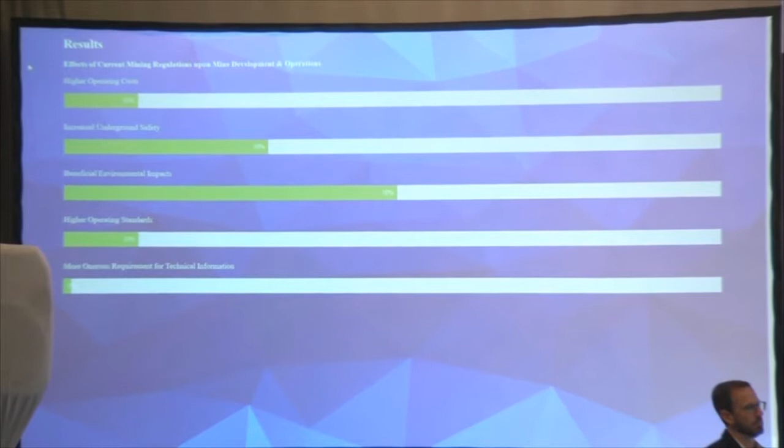Okay, thank you, Arthur. Okay, thank you, Natalia. Now, we are starting the last session, and our aim is to finish at 5:45. So I'll pass the microphone to Peter Robinson, who is director with Metal Fair, and the session will be focusing on sustainable mining, specifically technologies and operations which are available at the moment. Thank you.

Good afternoon. Well, I'd like to start the last session by offering my congratulations to us. We've survived an Arthur conference where not a minute is put to waste, and you're still here for the last session. Well done.

The last session is about sustainable mining. Now, I'm an operational miner and a digger, and it's interesting what sustainable mining means to everyone in mining. But for me, the key issues are environmental impact, progressive restoration, progressive planning for closure, underground safety. I'll be very interested to see how our speakers bring those issues into what they're going to say. Chris Bray will start us off by talking about underground mine planning and developing technologies.

Okay, this is working. Thank you very much for staying for the last session here. It has been referred to as the graveyard shift, but I think Arthur strategically put it as the last session because it's a very interesting hot topic in the industry at the moment. I think a lot of the following talks are quite complementary, in different levels of detail or aspects of developing technologies in the mining industry.

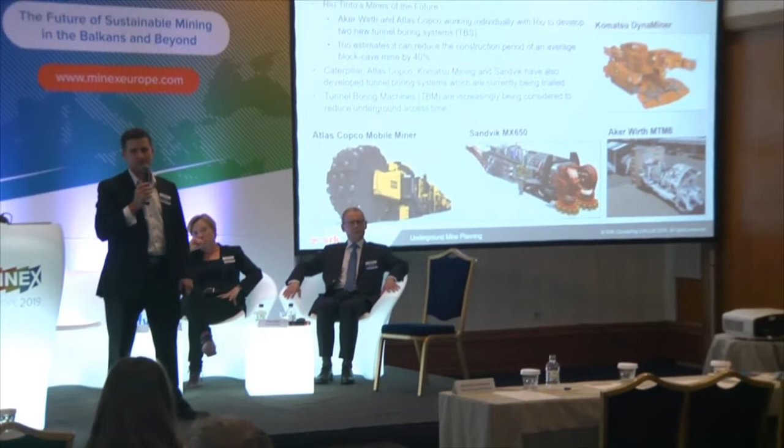On the topic of rapid tunnel development machinery, pretty much all of the major underground equipment providers are looking at different solutions to break away from traditional drill and blast tunneling machinery. The types of machines have all got different strengths and weaknesses and approaches, but generally use different modes of cutting and vibrating techniques for breaking the rock, which can have significant advantages from reducing access development time, which is just so important for paying back all that initial capital for getting new projects up and running.

But if we look at rapid tunnel development type equipment, some of the areas that we've focused on that compare the different options for machines, which make it a little bit limited in terms of rapid development, and you can lose some of that advantage of the cutting capacities of the machines, is that while you might have advantages of a lot less development and a lot less ventilation and re-entry time compared to a drill and blast type activity, you've got significant limitations on the turning radiuses of some of these tunnels from a lateral or a vertical aspect. Let's just say your tunnel profiles are a particular type shape.

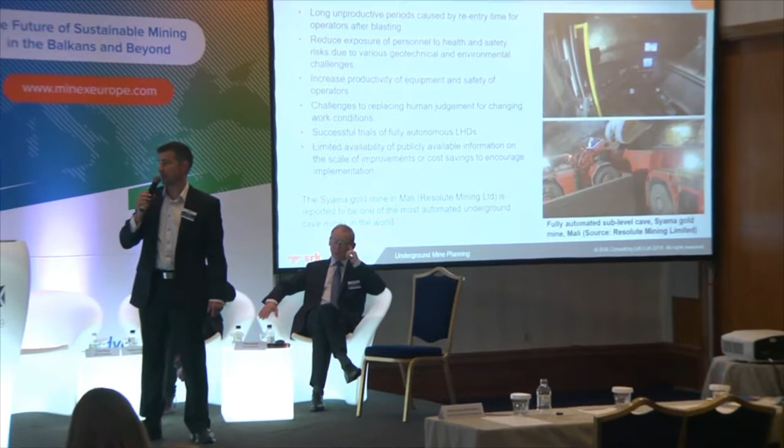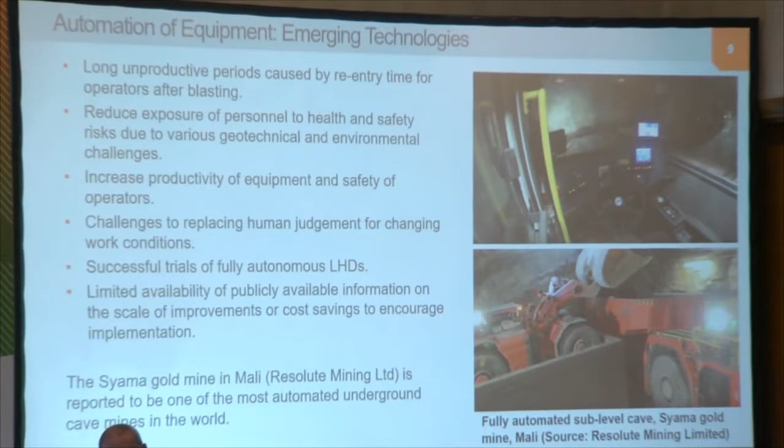One of the mines that's been in the news recently is the Syama gold mine in Mali. It's reported to be a fully automated underground cave mine. I look forward to hearing more about this and hope to see it one day. But it just shows that if they can develop a system like this in a place like Mali, you can probably do it in most places around the world.

So, you know, I'm trying to give the impression that while you should tread cautiously with all of these developing technologies, you shouldn't be afraid of them, because most of them, if they're at this stage now, they could be applicable to your future operation.

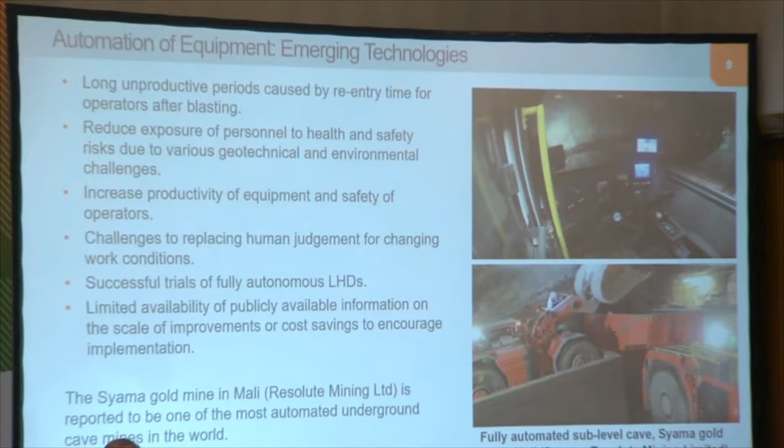With respect to automation of equipment, if you're going down that path on the mine design side, it sort of pushes the planning engineer towards, in a lot of cases, pass-type systems. Pass-type systems mean other type complications, whereas you want a system that's going to be reliable and it's going to last for as long as you need it to.

And I believe everything in this area can be engineered, but it comes at a cost. So you've got to go in there with your eyes wide open and not just assume that one size pass fits all. It's not the case. They can be very costly items if they're not going to be developed for the job.

Sorry, running away out of time here.

One of the themes that is popping up more and more often is underground processing. This can be in many different areas, but we see it a lot with underground backfill plants. People don't want to move waste further than they should, and they shouldn't.

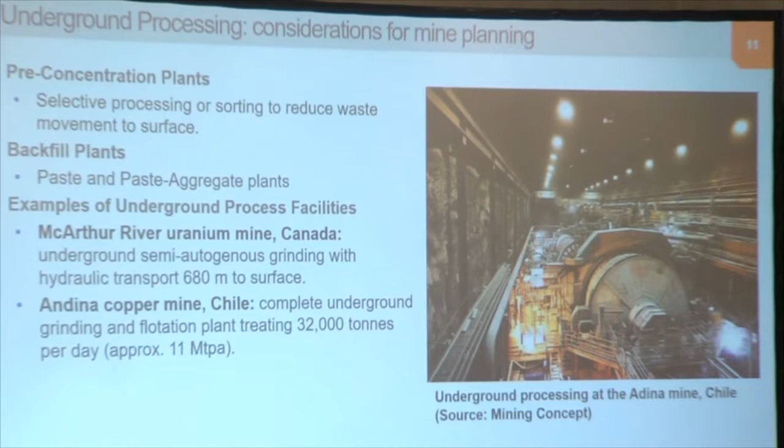So just in conclusion, there's some real benefits to some of the developing technologies that I've shown you here. I think you all should consider them. So don't be afraid. The benefits hopefully will be greater than the cost.

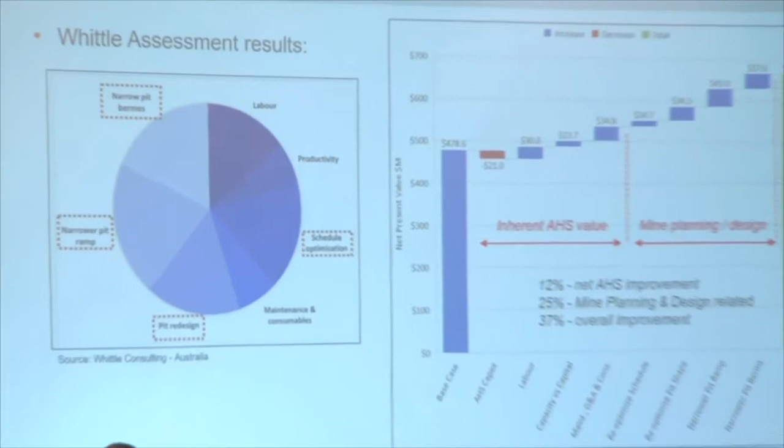And 12% of that is due to the net autonomy improvement associated with the reduction in cost, but 25% of that increase is actually due to mine planning and design opportunities. So even though this is conceptual, it does show that there might be some significant downstream strategic benefits in autonomy that are often underestimated.

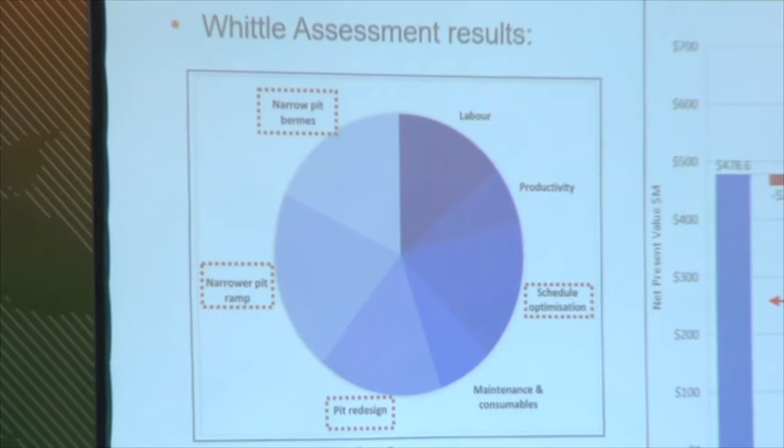So the approach to their study, they used costs based on autonomous operations in Western Australia. They assumed 700 to 1,000 additional hours per annum per truck, so that means there was a reduction in the overall fleet. Tire replacements were scheduled at 6,000 to 7,000 hours instead of 5,000, which is typical. A reduction in costs meant that the pit needed to be re-optimized, so the Lerchs-Grossmann algorithm produced a larger, more profitable pit.

Because autonomous haulage uses high-precision GPS, which is accurate to centimeters, there's a lower passing tolerance on trucks. So they also incorporated this in the ramp design, which would affect the overall slope angle. Needs to be confirmed by a geotechnical study, of course. Autonomy can be better coordinated through periodic two-way passing lanes. There's a lot of potential for that.

And because you've got fewer human operators in your pit, the severity of a rockfall would obviously be reduced, so there's potential for looking at higher risk slopes, basically. Of course, this is conceptual, and we would definitely advise if any of these considerations are incorporated, you do it in a proper geotechnical study.

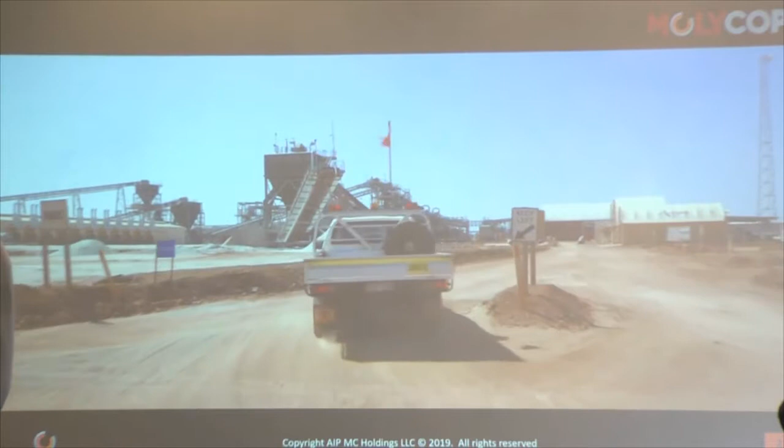For us, these companies shoulder the responsibility of progress. They keep society moving forward, building sustainable relationships, and developing the communities they work with. And we proudly stand beside them. In fact, we go with them to these places out there that others deem too hard, too far, or too costly. We go to liberate the value of every resource. We go to the ends of the earth.

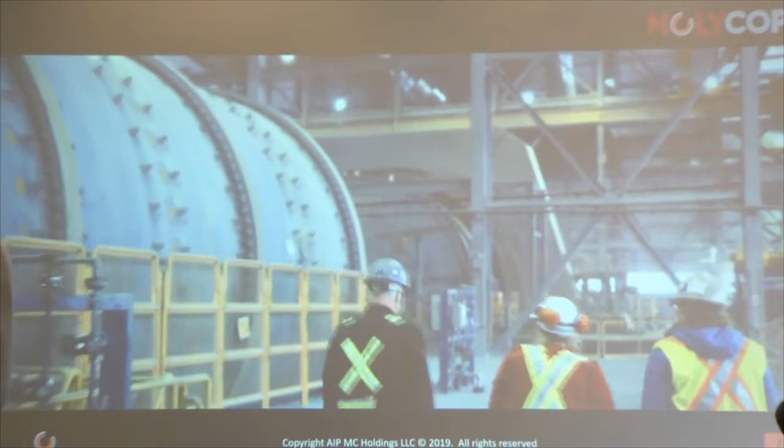How's it going? Good, good. How are you doing? With them and for them, to ensure our finite resources are responsibly used, while never compromising on safety and always fulfilling our promise. We are Molycop, and we're in the business of liberating value for those we serve. To the ends of the earth and back.

This is what mining for us is all about. It is working along with mining operations, with people that are there on a daily basis in these very remote locations, trying to liberate value that will support the development of society. So if you then try to translate this into what we do today, the products that we make in our company and the products that we always try to supply to our customers are meant to be responsible to generate value on the mining operations that we serve.

The products that we sell, of course, are intended to generate a profit to our company, but not just because we will sell high volumes of our products, but because we will sell something that is useful, that will generate the right effect on whatever application it's meant to be used for, and also because of the way we actually make these products in our own factories.

Whenever we are making grinding media in all of these factories we have all around the world, we always think on how to make a product that will generate savings for our customers. And whenever we talk about that, we always think about where the raw materials are coming from, how this product is made, how efficiently we are using the energy that is needed to manufacture some of these goods, and also what will be the repercussions of the use of some of these products for all of our customers.

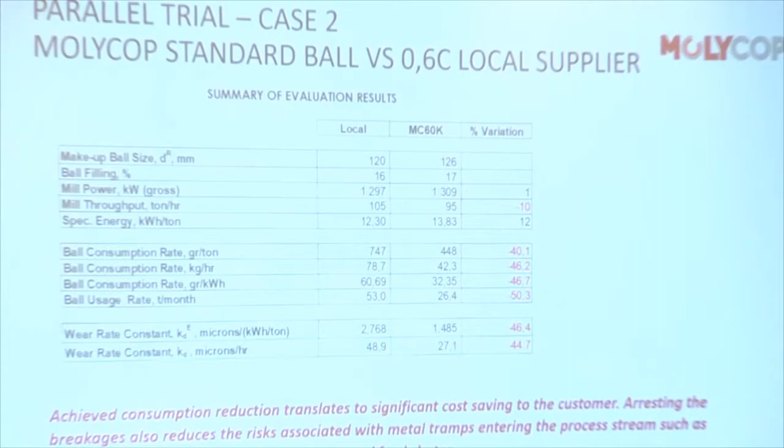Something that is really important for us is always to work along with end users about what they are targeting, what they are willing to do, and how to help them achieve the specific goals on their operations. It's not just for us to work on supplying products at the right price. It's for us to work along with all of our customers to know what they need, to know what they want, and to tailor-make products from start to end.

Nowadays, the way ores are developing, changing on a frequent basis, is forcing most of us in the industry to really be flexible about the supply of products we have available to provide. If you're not really on top of these things on a regular basis, your chances to really develop something good for your customers are kind of limited.

When you look at technical services, all mining companies are always targeting to reduce the OPEX, to have the lowest cost of operation, the lowest cost of ownership, and to be as efficient and productive as possible. And for this, it is no secret for anyone in the industry that being in this commodity world, it's always difficult to have the lowest cost whenever you're operating a mine site. So providing not just good products and good quality will allow mining companies to be really aware of what is happening, really on top of what they really need and want, and also to be able to make more money.

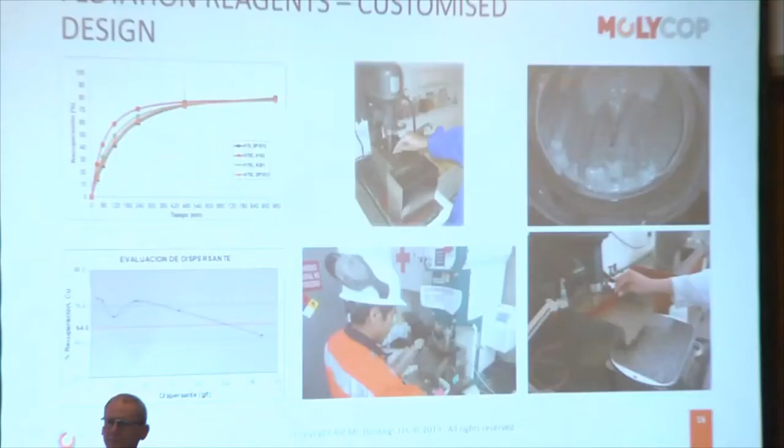Trying to finally give you a message about what we have that will be really interesting for you to look at: maybe most of us have heard about the Molycop tools. The Molycop tools is a tool that has been in the market for almost 40 years, is about to be launched in its version number 4, and is used by metallurgists and process operators all around the world to really look at how the process could be improved in such a way that they can generate more recovery, having a very good understanding of the parameters and operational variables.

So I encourage you to have a look at this because this is something that we provide to our customers on a regular basis, and it's really useful. At the end it is directed to the exact same purpose, to be more efficient, to be more productive, and to save money.

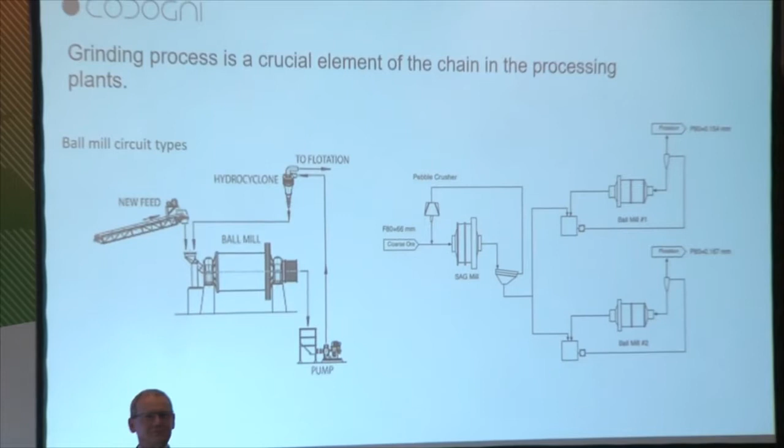So, as we all know, the grinding process is a crucial element in the chain of processing plants. How it looks depends very much on the design. There are SAG mills, autogenous mills, ball mills, primary ball mills, secondary ball mills. So these circuits can be very simple, like you see on the left, or much bigger, as you see on the right. But what is very important for all operators or managers of processing plants is the composition of costs. Of course, it might differ, but this is what I tried to collect.

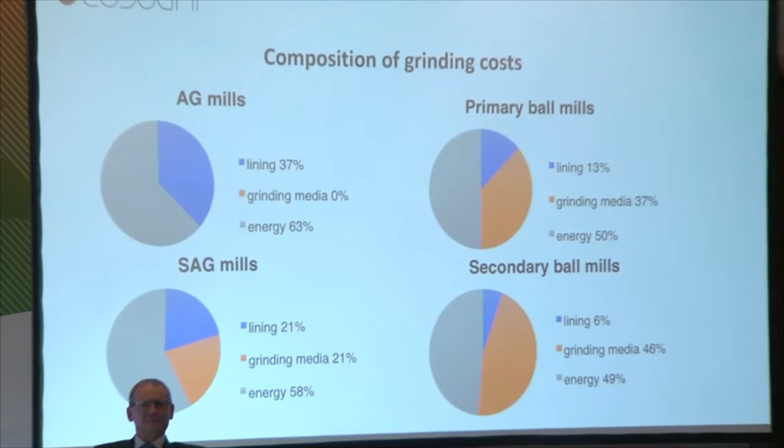So, of course, in autogenous mills, there are only two components of costs: lining and energy. That is the biggest part. And other mills, SAG mills and primary ball mills and secondary ball mills, have this additional cost component that, especially in the case of secondary ball mills, is quite a big one, almost half of the total cost of the mill operation.

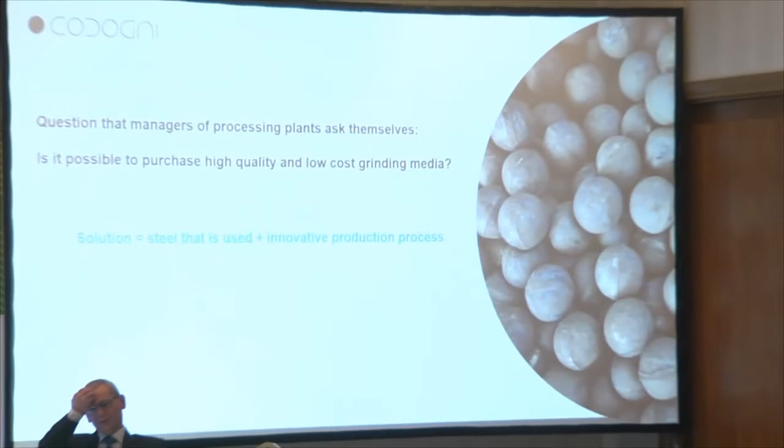So the question that has to be asked and is asked by managers of processing plants is: is it possible to purchase high quality and low cost grinding media? And we have our own solution to this question, and of course the answer is yes. And the answer consists of two elements. One is the steel that we use, and the other is an innovative process of production that we implemented in the 20 years that we are on the market.

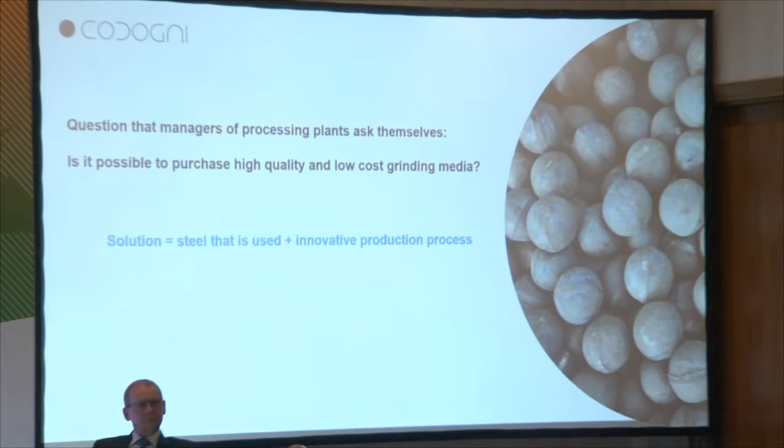So the steel that we use is recycled rail steel. We buy rail that was used, that is changed regularly, and this is our basic and, in fact, only material. And it's a very high quality material, because it had to be very resistant, and it's perfectly good material to be recycled and used for balls.

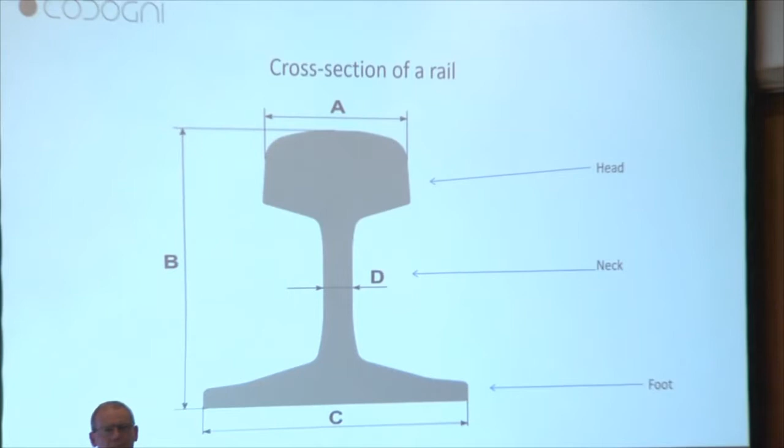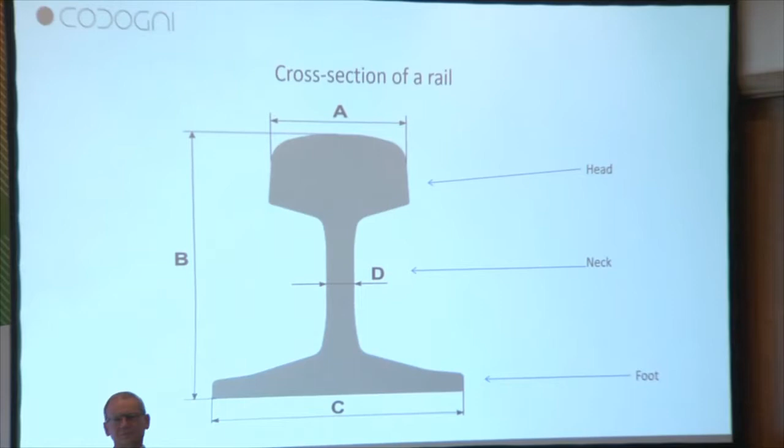Just to show you how it looks, here we have a cross section of rail. For the moment, we are using only the head of the rail to produce the balls, but we are planning to use the rest, and this is a very big technical challenge that we are in the final process of. We are doing the final tests, and we are quite confident that we'll be able to do it very soon. So from the head of the rail, we can produce balls with diameters from 60 to 100 millimeters. From the neck, we will be doing 30, and from the foot 40 millimeters. And also from the head, we will be doing 50, so we will expand the range of our production.

As for the production process, we are separating parts of the rail, for the moment using only the head, but in the future also the rest. We heat the head to more or less 700 degrees Celsius. We cut it. We add additional heating to the process. We forge the balls, because what we produce are forged balls. We cool down the balls, and then they land in water for the quenching process.

And what are the benefits of this process? First of all, short production cycle, low energy consumption, and limited CO2 emission. It's a consequence of cutting in between heating, so we don't lose the heat and we don't use so much energy. Lower forging pressure, which results in better endurance of the tools. Precise control of temperature, and as a result, our costs are much lower than those of alternative technologies like casting and rolling. Thanks to this, we can achieve high homogeneity of hardness of balls, and of course this results in much better ball endurance.

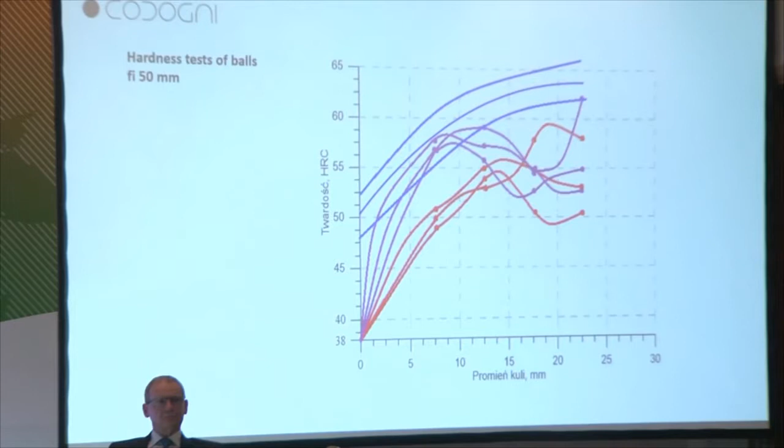The same story with this violet ball. Also, we measured it the same way. I mean, we didn't measure it, we sent it to the laboratory, so it was officially measured. And the top blue graphs, this is what we achieve in laboratories.

I mean, the middle line is the one that we managed to achieve, but we know that in an industrial situation it will fluctuate more, so we also added these two more lines on the sides just to show that, okay, we are not confident that it will be such a perfect shape, but we are sure that it will be in between these blue lines. Here's the same for hardness of balls diameter 40.

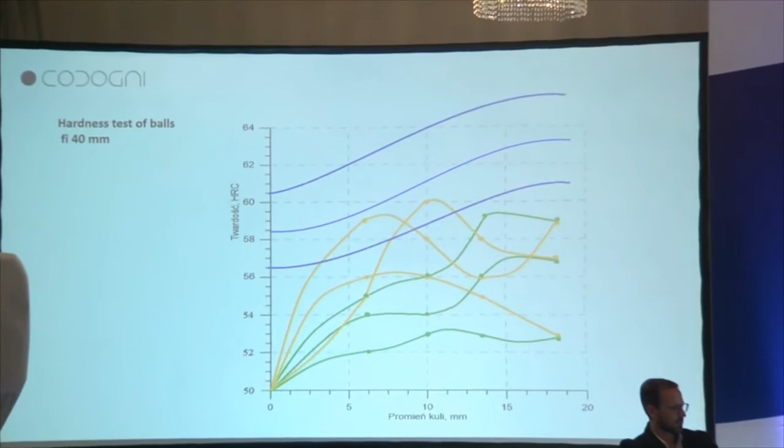Again, the same story. So the yellow lines are the measurements done on the balls that we got on the local market. And again, 3 points of measurement around the ball, and they are very much different hardnesses. This was the same diameter inside the ball, but very much different. It really fluctuated, the same with the green ones, and this is what we managed to achieve in the laboratory. So these are the blue lines.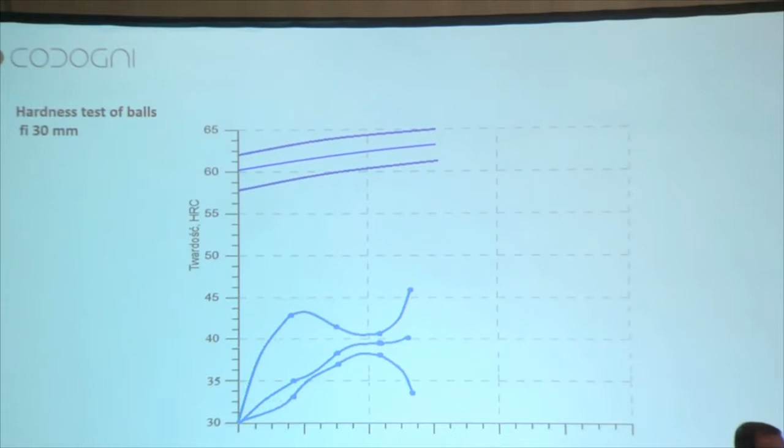And the main reason, next to the fact that it was innovative, creative, and so on, was that it was very simple. Of course, it needs a lot of know-how, it needs a lot of experience. We worked on it for more than 20 years, but this was a very pleasant success that we achieved.

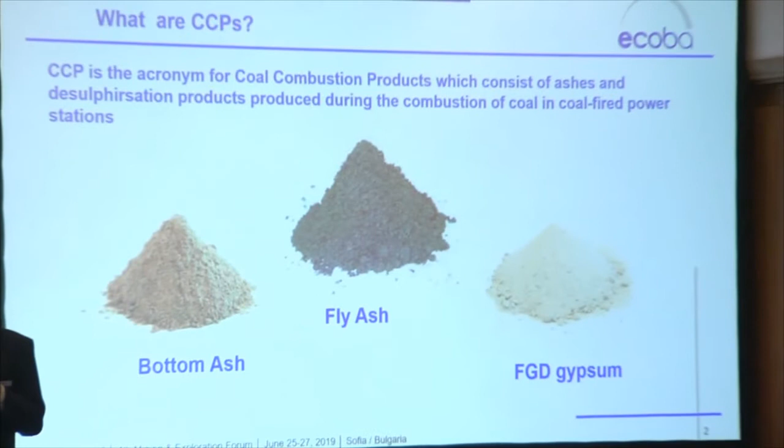And I will give a few words about the topic that starts with coal mining, partly ends up in mine backfilling, and might end up with ash mining from deposits. I'll be speaking of coal combustion products on behalf of the European Coal Combustion Products Association. So first of all, what we are speaking of: by definition, coal combustion products are residues from coal-fired power plants, and there are two basic classes, ashes and desulfurization gypsum.

A few words about the association. It was established in 1990 by European energy producers and follows dealing of all matters linked with coal combustion products with external stakeholders. Our association has 23 members from 17 countries, power utilities, including also regional associations and supporting companies like ourselves, Carmeuse.

Carmeuse is the global leader in the lime industry, and we follow two targets. Within ECOBA, we use ashes in our binders, and we use our lime for ash stabilization for several purposes. And by the way, we are also your fellow miners. We operate our limestone quarries.

So, as I said, the mission of ECOBA is to promote beneficial reuse of coal combustion products and encourage the users and support the users, and to communicate with policymakers, regulators, standardizing bodies, and other important external stakeholders. I will skip the content in favor of timing, and let's move directly to the body.

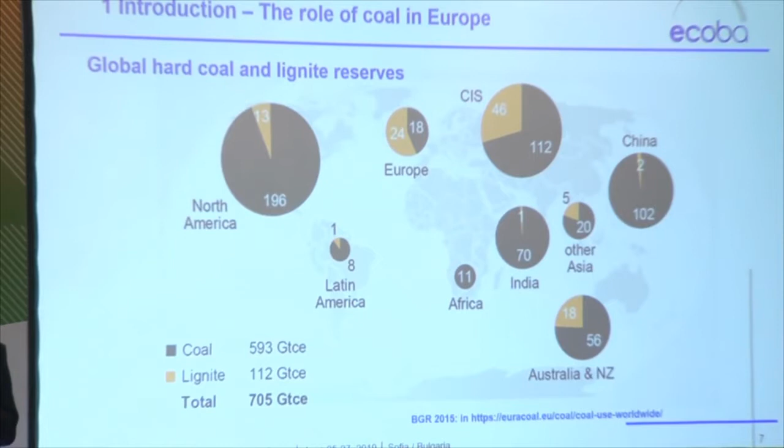So, as we can see, everything is starting with coal. And as we can see from the chart, Europe is not a superpower in coal mining, but a significant player, which converted to figures means some 450 million tons of coal excavated. Lignite is prevailing, and the more southeastern Europe we are going, the more lignite we are speaking of.

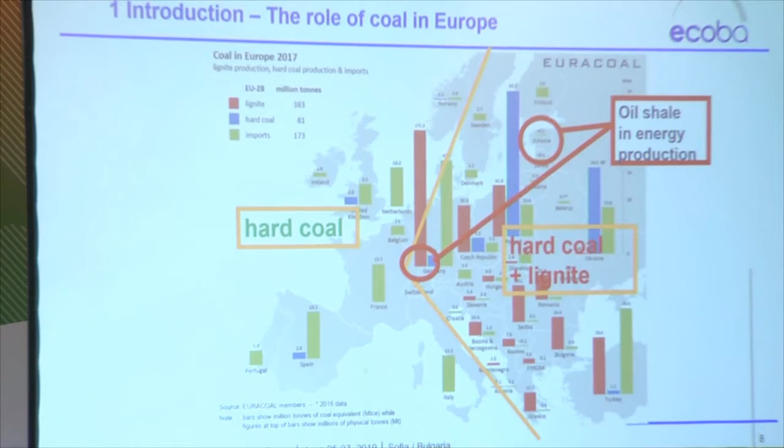Then, besides this, and I should not forget the oil shale as a kind of spot fuel, almost 200 million tons of coal of any type is imported in Europe to feed the fossil power plants. We can see that they currently keep some 17% of the primary European energy mix, and this will be gradually decreasing. Why? We will be speaking about low carbon economy later on.

So, moving to the generation of CCPs in a power plant. In fact, it's driven by the legislation and regulations. Keeping all these elements of regulations, rules, legislation, the conventional power plant, and I will take an example, generates out of 1 million tons of coal incoming some 200,000 tons of CCPs: bottom ash from the boiler, the fly ash that shall be removed from the ESPs, then FGD gypsum from sulfur oxides removal, and finally they also need to remove nitrogen oxides.

What does it mean in European figures? So, as a sum, some 40 million tons of CCPs are generated in EU 15 countries. If we look at Europe altogether, it's 140 million tons of these products generated. Looking at the figures and the timing prospect, we can see, at least in EU 15 countries, that these volumes are gradually decreasing, and it will continue. Not that sharply in Eastern Europe, Southeastern Europe, but it will decrease gradually.

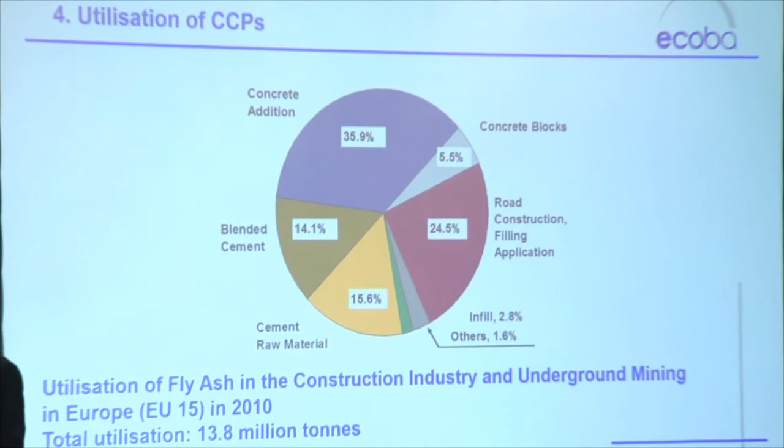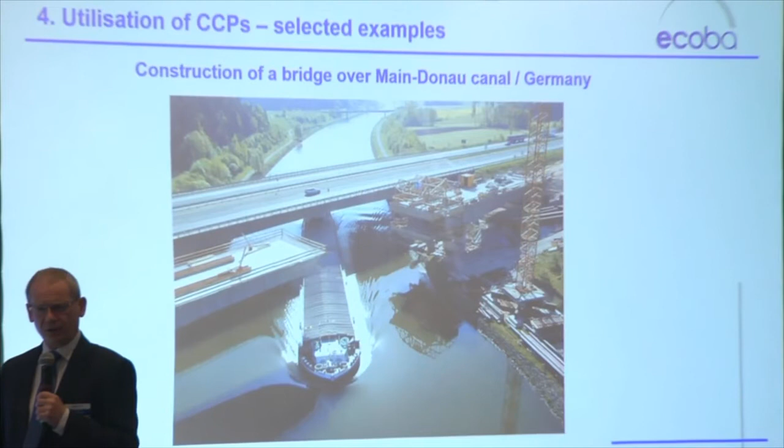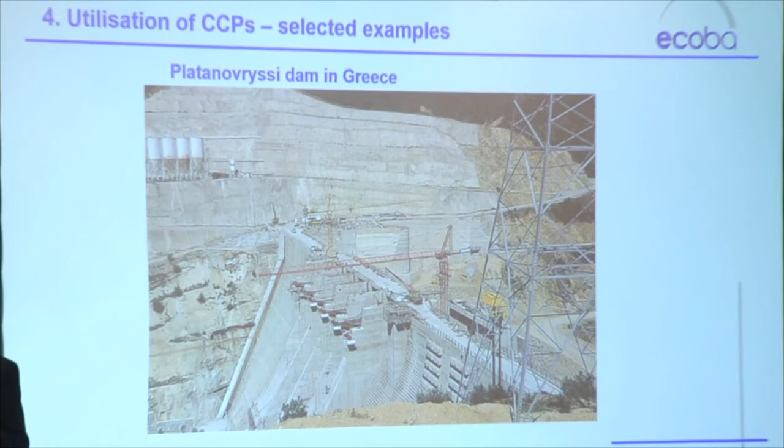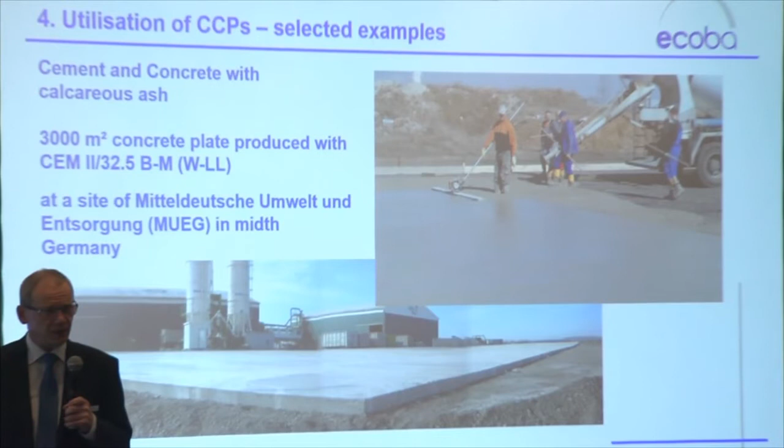And let me give you a few examples. High performance concrete made with ash admixture for bridge construction in Germany. Hydrotechnical concrete, very demanding for reaction heat and that stuff, where calcareous ashes were used in Greece. Conventional concrete and cement using calcareous lignite ashes in Germany are another example.

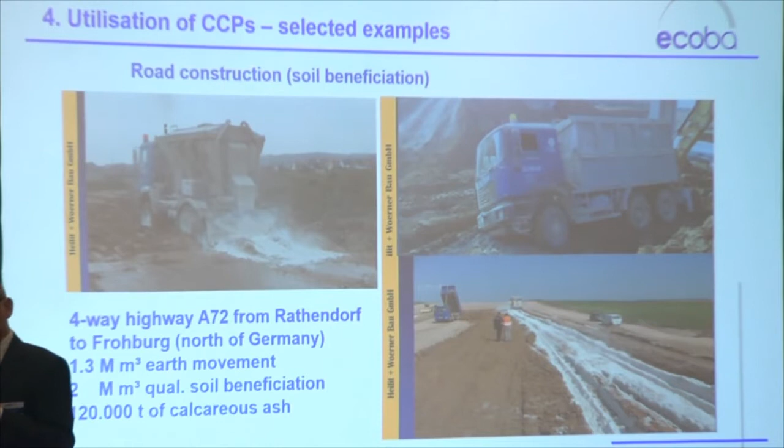And something that doesn't seem relevant to your industry, but it does: mud stabilization, soil stabilization is used widely in road and traffic construction, but I can give you 2 cases of mining spoil stabilization with mixed binders. One of them was in the Czech Republic, for geotech purposes to manage the overburden. The other, recent one, is from the flooded mine in Serbia, where the mud was stabilized to enable construction machinery to liberate the flooded excavator.

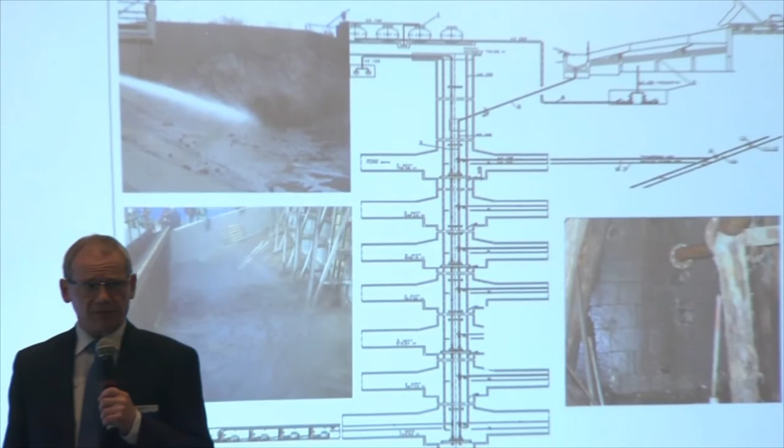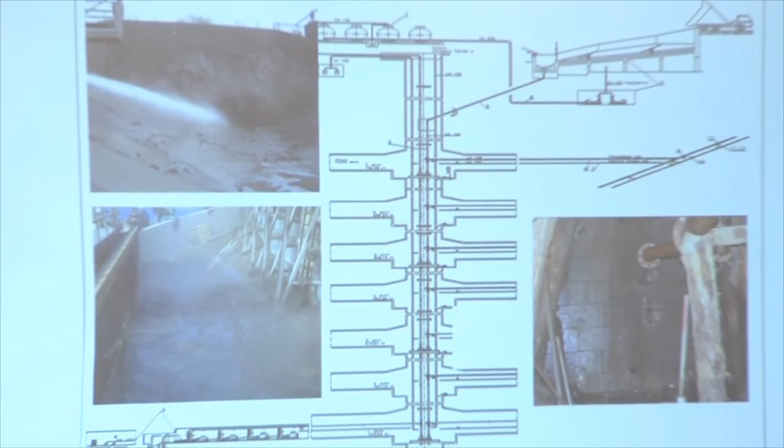Another example, concrete blocks already cited, and again, a real example from mine backfilling. This is a currently running case in Hungary, where the CCP slurry, meaning ash and gypsum, stabilized with lime, is mixed into a fluid grout and used for backfilling to prevent acid mine drainage.

I was speaking about construction products on purpose, because everything that complies with the construction product directives and regulations basically complies with the mining rules. They are softer. The first very important piece related to CCPs is the Construction Product Regulation, which was first implemented to foster the movement and use of construction products in the EU market. And the last revision includes important measures on hygiene, health and environmental safety, and also sustainability. We've been speaking about sustainability, reuse and recycling many times, and we will be speaking again and again on this topic.